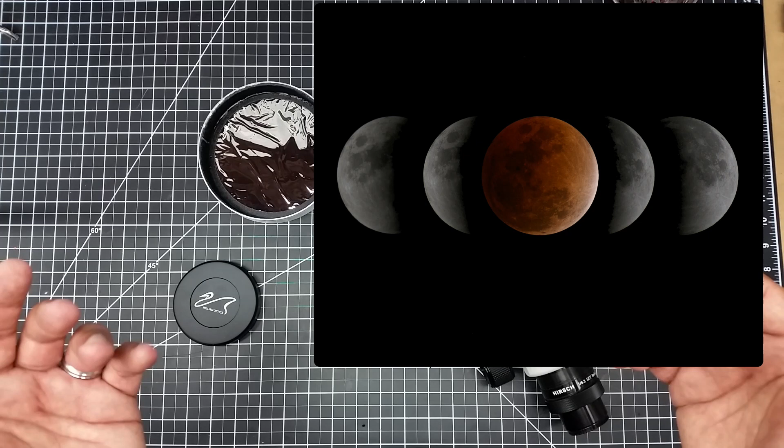Astrophotography can get to be a very expensive hobby, and that's one of the reasons I'm not involved that much in it anymore. But I still have some of the stuff left. With the solar eclipse coming up here in August, I wanted to do some images of it. Now, I've shot a lot of solar eclipses in the past. I'm more of a fan of a lunar eclipse. I'll put a picture of a lunar eclipse I did a few years back - I can't remember, I've done several of them. I just love the blood red moon, and I love cutting them together as they come together.

Anyways, I plan on doing, if it's clear out - now I'm in Michigan, we won't get totality here obviously, but we'll get good enough where it's interesting. So if it's clear, I'm going to try shooting some of that and do a time lapse. And then also I want to do a close-up. I've got this very nice William Optics 400 millimeter scope here with field flattener that hooks to my DSLR, or one of my DSLRs.

One of the things I have from a prior life or experience is this 6-inch visible light solar filter. Now also, forewarning: do not look at the sun during the solar eclipse. Even the only time you technically can look - and I don't suggest it - is during totality, but it will still blind you. So have the right equipment. Google it, whatever, I'm not here to tell you what the right equipment is. I'm just here to share how I'm going to 3D print something to attach this solar filter, which I have from a former 6-inch solar scope I had set up, to this William Optics refractor.

So in short, basically the opening of the sun shield is about 85 millimeters, and this is about 145. So what I'm going to do is print an adapter ring that will adapt this to this scope and allow it to attach like this, so I don't have to buy one of these. They're not too expensive, but by the time I get one and everything else, I just thought this would be a neat project.

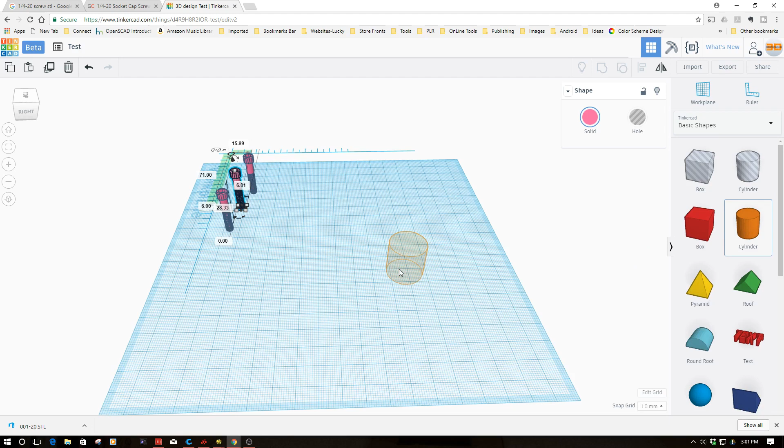So I'm going to use these 1/4 20s, and I'll show you how. But first, where did I get them? I went over to GrabCAD and downloaded the STL file for it, and simply imported it into Tinkercad. Now that I have these 1/4 20s in there, I'm going to bring in a cylinder for my base object, and this is going to fill in for the filter, for this sun filter, the 6-inch sun filter basically.

So I'm going to go ahead and pop in, basically, I'm going to go 145 - whoops, if I get it right here, 145, because I'm at 144.5. I want to go... no, I don't want to go tall. Actually, I'm going to take that back. I'm going to go 144.8.

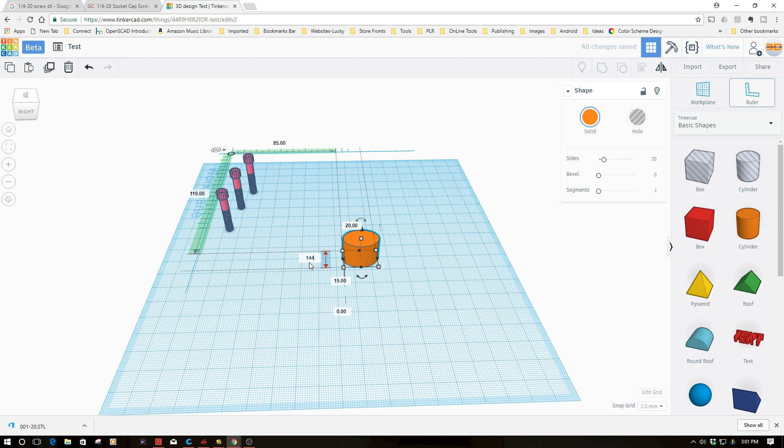And I'm going to go 144.8. If I get this in here. 144.8. Why are you being so difficult? Then it decided it wanted to be.

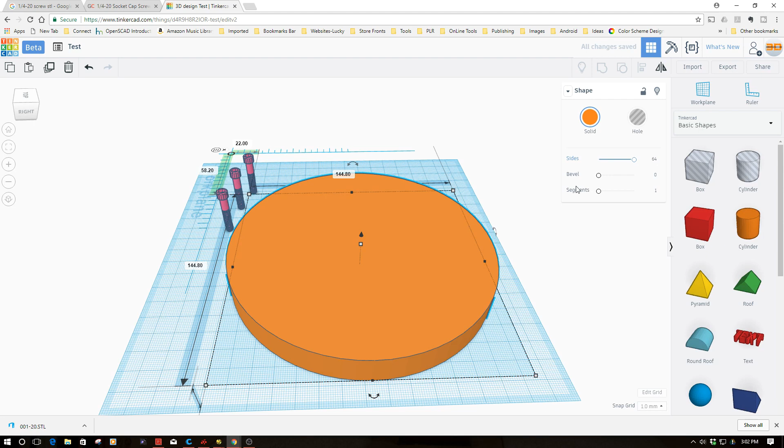Now, the other thing I'm going to do is, I'm in the beta of Tinkercad, so I'm going to move up the sides. I want smooth sides, I hate those rough openings. So now, I've got my diameters worked out. You'll notice I'm 15 millimeters high, and basically my opening is about 28 millimeters high, so I'm going to bump this up to 28.

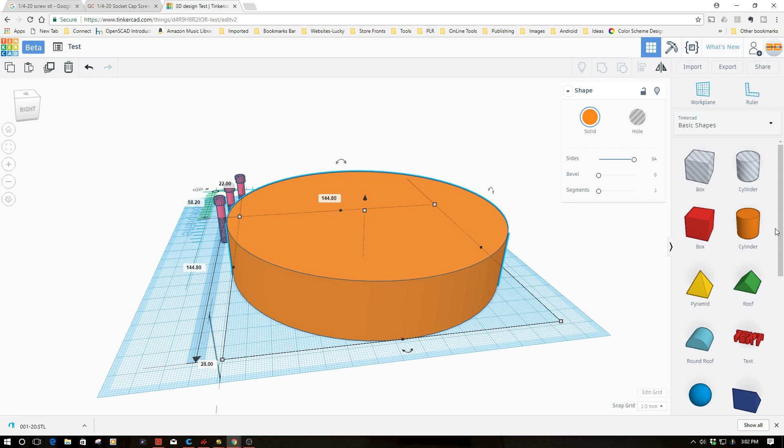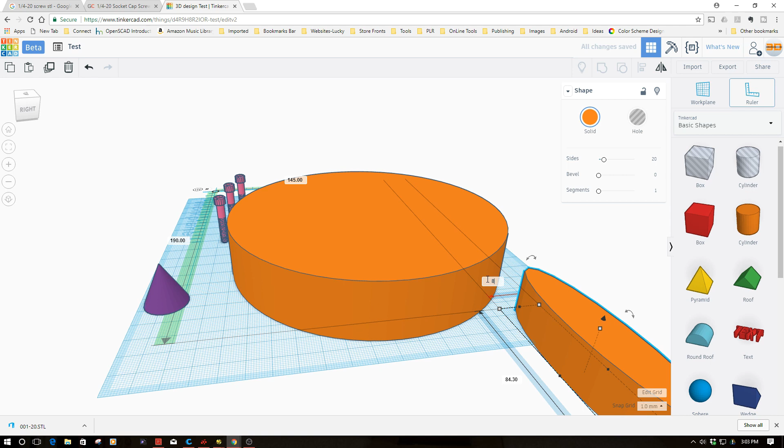Now what I want to do is use the cone, so I'm going to bring the cone object in. And then I'm also going to bring in a cylinder because I'm going to have an opening of roughly 84.1 millimeters. So I want to bring this in, and I'm going to say 84. I'm going to make this 84.3, give myself a little leeway. And then 84.3 again. And then I'm going to bring this over, and bring this up, just using an arbitrary size for right now.

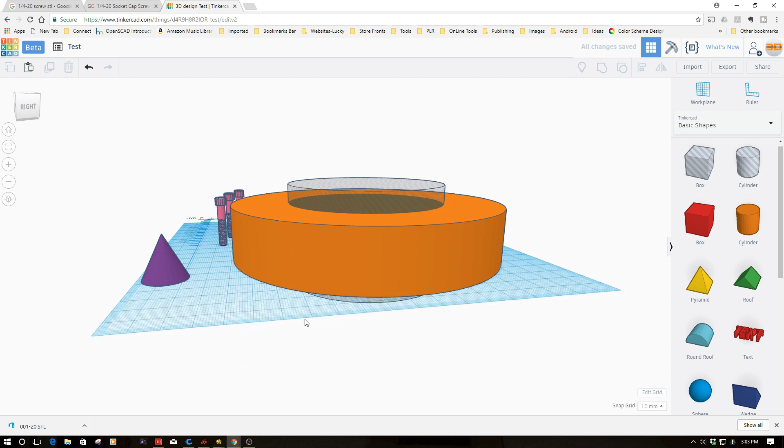I'm going to turn this into a hole. I want sides, and I'm going to push this down so I have a hole, and then I'm going to do my favorite tool, align all this, so this is all nice and good. Now if we look underneath here, we see we have this knockout. Now you notice I still have this big area.

Now one of the things, I'm going to have the lens hood pushed back in, so when you have a lens situation, you basically have a flare or a funnel, and this is where this guy is going to come in. So what I'm going to do is set his base at about, I'm going to make some guesstimates here, about 130. And I did the height again. I hate that all the time, I mess up and get the height.

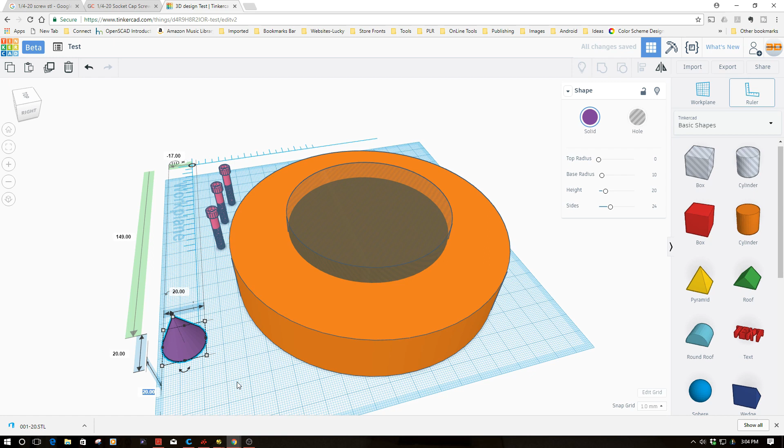Just one of the things of life. So again, I'm going to go here, 130. And again, here, 130. And hit enter. And I'm going to bring up my sides.

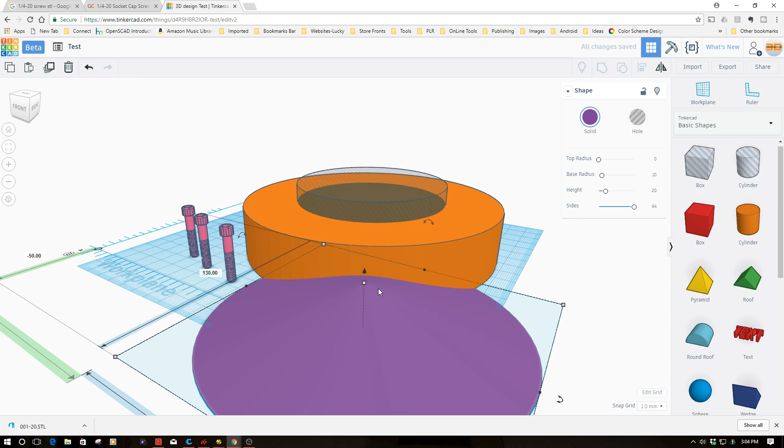And one of the things I want to do is just pull this up. And then I want to bring this into this object here. And part of it is, the reason I put this other circle here is I want to measure this, kind of cheat a little bit. But first I want to take a look at this.

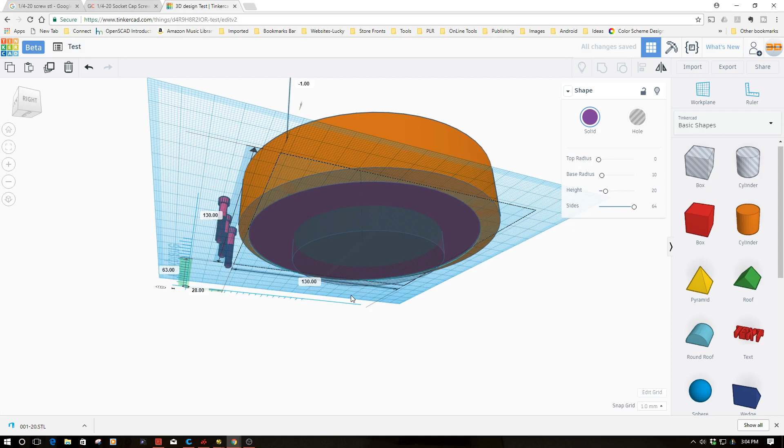So I want to push this down a little bit so I'm through the other side, sort of like that. It doesn't have to be perfect, or at least I don't think so right at this juncture. And I just want to kind of get all this so I can center this. So this is centered. Now what I'm going to do is click on this cone again.

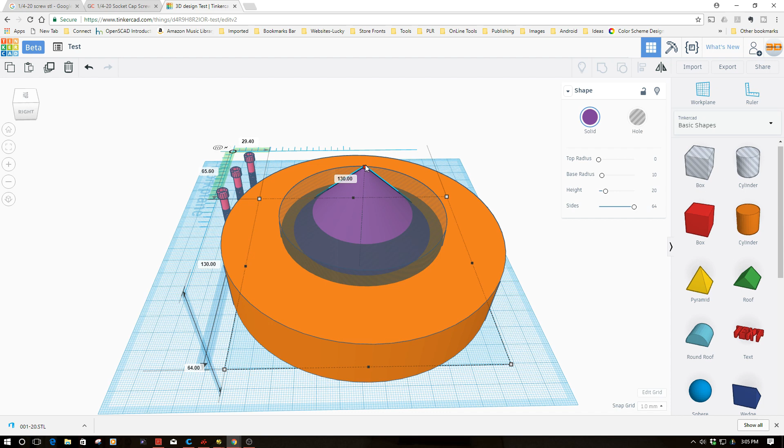And I'm still pretty much short of everything, so I'm just going to keep pulling this cone out until I hit an angle that's pretty close to coming up to my full circle that I have here. Now I need that other circle for a couple different reasons too. So now I'm going to also click this, and turn this guy into a hole. So now this is going to give me a taper.

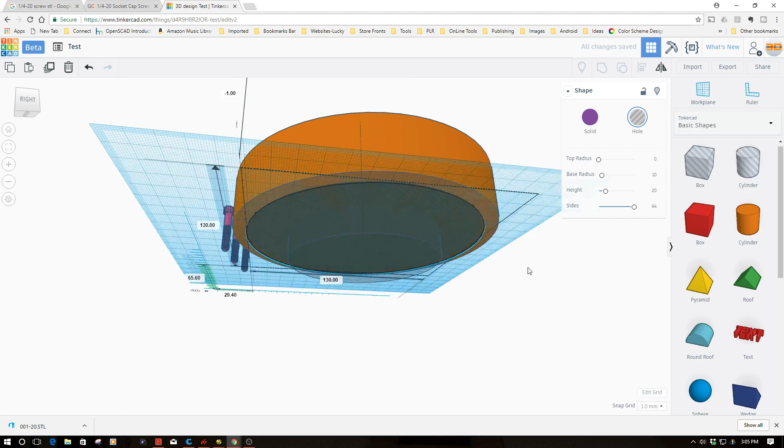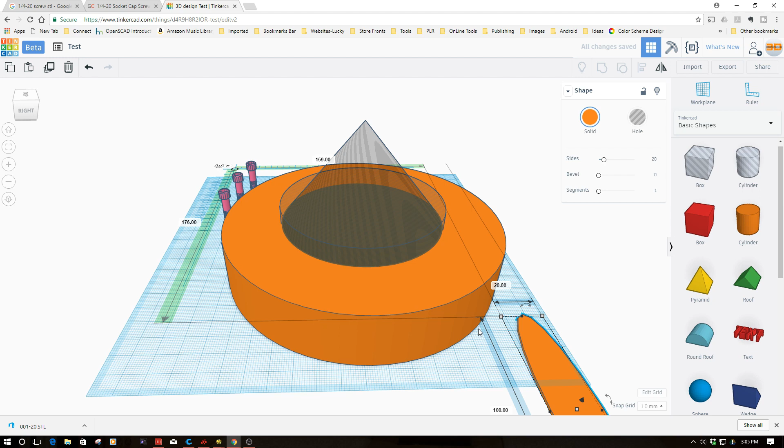Now the other piece that I need to do now is bring in another circle. So this circle I'm going to bring in over here. I'm going to make him, if I'm about 64, let's just for grins and giggles make him 100. And nope, I did it again. Isn't it a Britney Spears song? I did it again, oops I did it again.

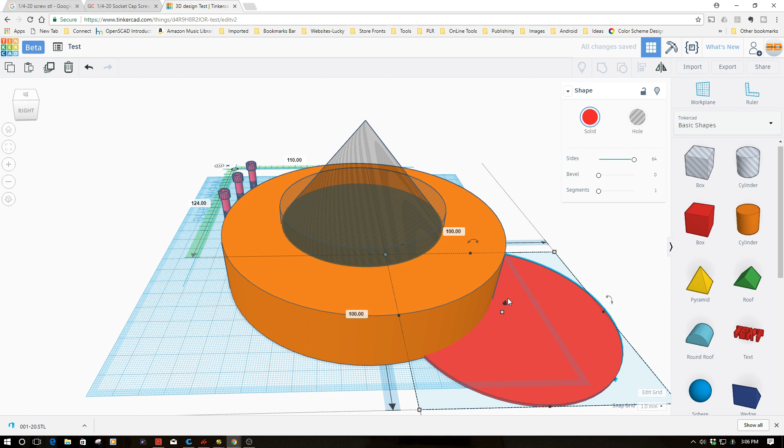Anyways, we're going to make this 100, and I'm going to pull this over here, and then I want to get my sides up there. All right, come on, pull my sides up. It's going to start probably getting a little laggy. I want to change the color of this so I can just kind of see what this is. So I'm going to pull this up. I don't want to move it around, I want to pull it up. There we go. And then I want to pull it up in general.

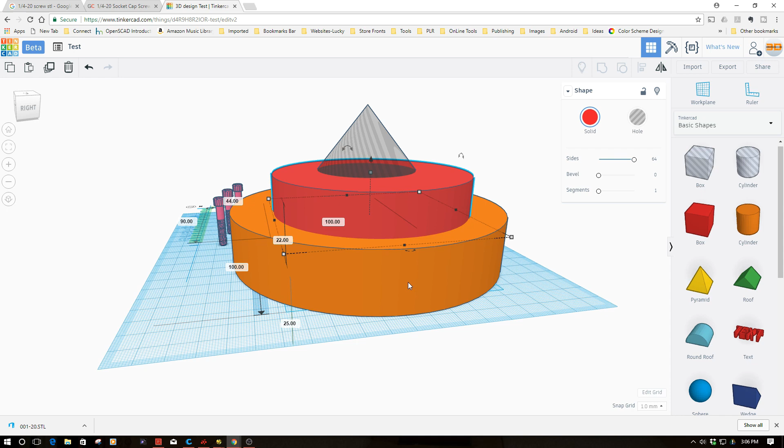So I just have a little bit. And then I want to bring this over into this piece. Now I want to see how. So I have this at about 22. And that's actually quite a bit. I think I'm going to bring this down. So let's see, I can cut a little bit out of this. So what am I at on this?

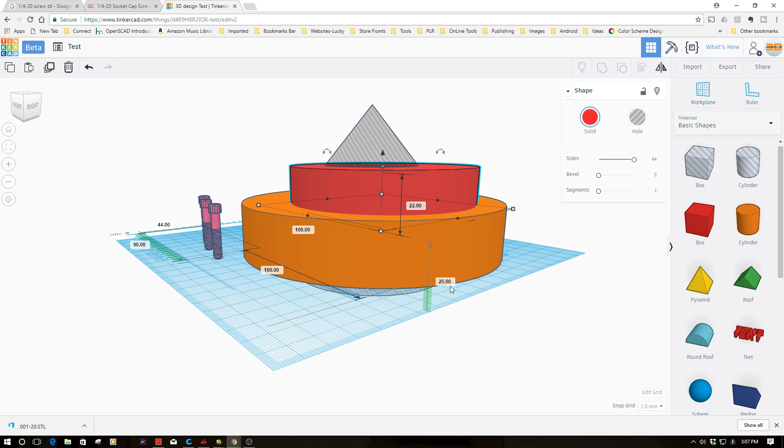So I'm at 28, that's what I wanted to be. And now this one, I am at 22, but how high am I? I think I'm at 25, so I've got 20 exposed. I could probably knock this down to, say, 20. And that looks pretty good.

I think that'll work. Now what I'm going to do is just highlight all this gobbledygook. I think I got it all, except my bolts. I don't want to highlight my bolts because I want to square all this up. And I think that should be all squared up.

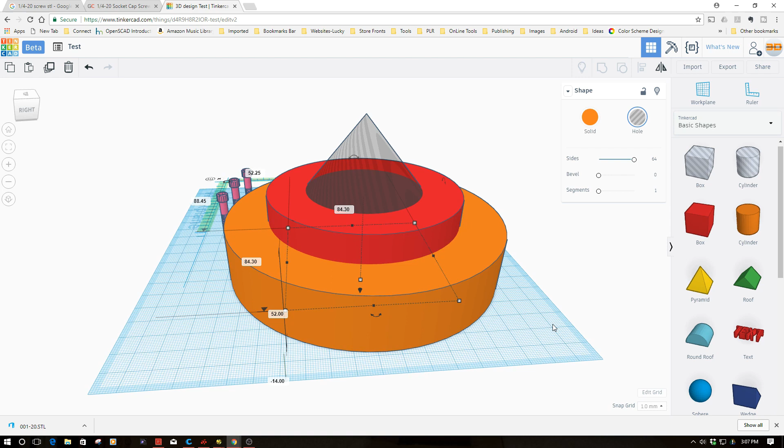Oh, the other thing I have to do, I almost messed up a little bit here. I want to select this, and where is it, the pull up? I want to pull up. All right, that's perfect. I still have it poking through there. That's why I brought that other piece in like that.

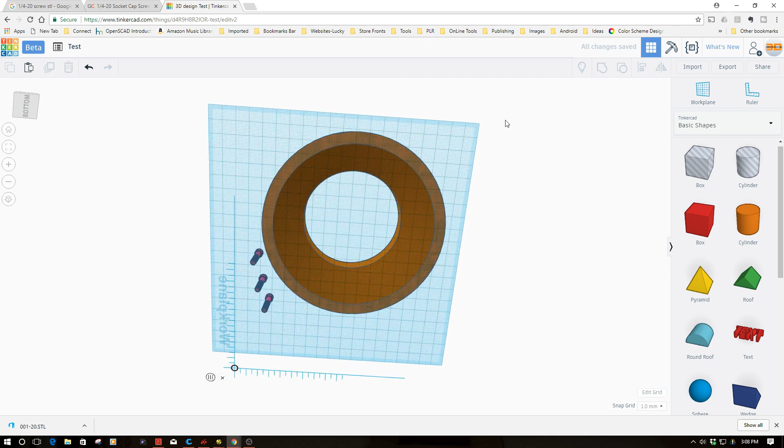All right, so now I am going to go ahead and join all this together. And boom, now you see I have a flare down here on the bottom that forms into a cone. So I shouldn't have, because I'm going to have the sun shield back, so that should be enough where I'm not going to get any vignetting.

Now what I need to do is I need to take these screws, or bolts sorry, and then what I need to do is turn them around and rotate them. Actually, I should have - well no, I can still do that, but I just don't want to confuse you guys. So I'm going to bring this at 90.

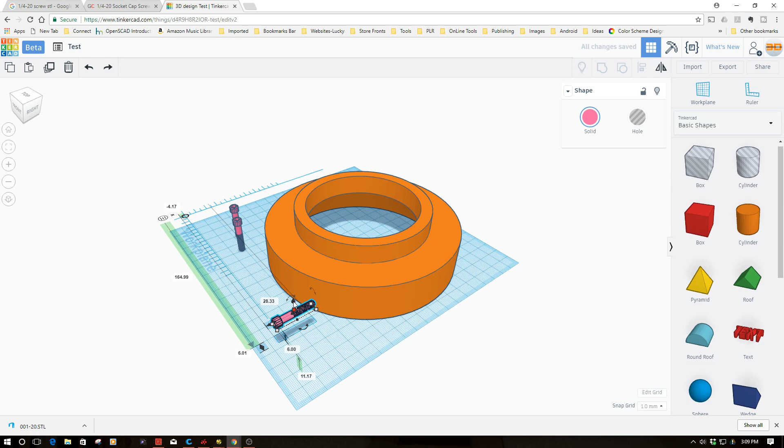Now what I'm going to do is not that. That is wrong, Joe, that is just plain not right. So I'm going to actually save myself some headache. I'm going to get rid of these. I should have thought about it before I did that so I didn't confuse you.

But I didn't, so I'm going to make 3 copies of these at this. Now what I'm going to do is insert this, and drop this guy, because I'm going to use some 1/4-20 nylons to cinch this to the telescope, and I am going to bring this down.

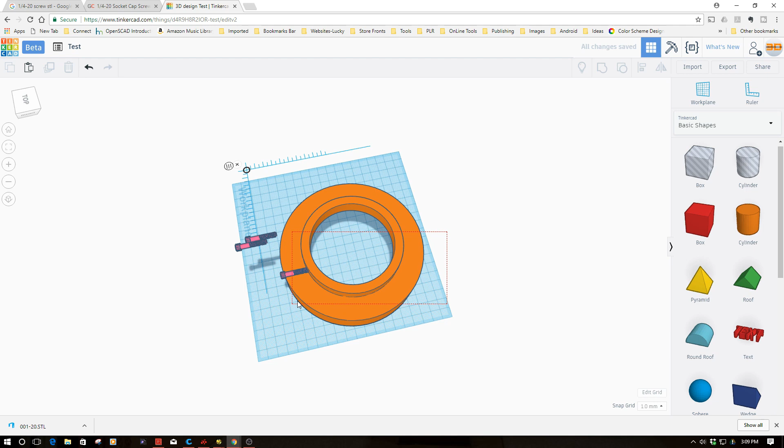And then what I'm going to do is make sure I get these, and then let's go ahead and do an align. All right, so now I got that aligned with that. And now I just need to poke these threads through

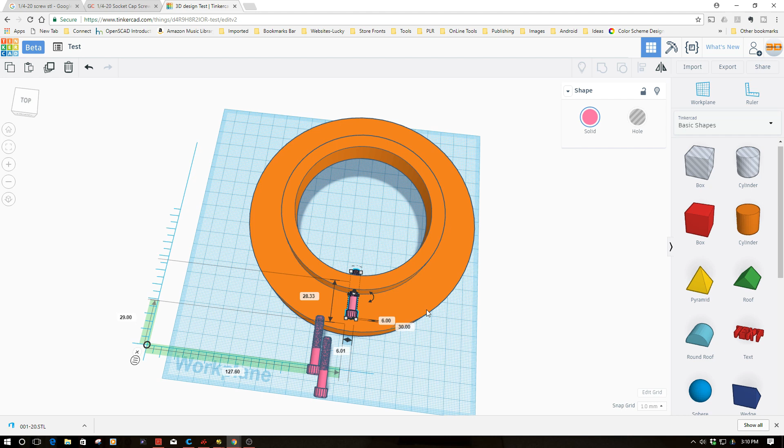the other side. I want to see. All right, now I just need to see how far I'm here. So I want to go up a little bit, and that's about centered. So now I'm going to have to remember this 33. So remember that for me, 33.

Now what I'm going to do is turn this guy into a hole, and then I'm going to highlight and group this. And it's going to have to probably do some thinking.

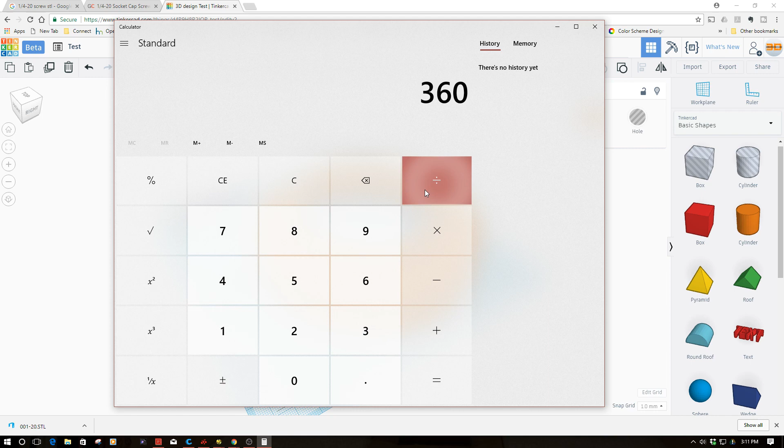All right, now what I'm going to have to do is rotate this, and what I'm going to do is pull up my calculator. I think I can probably do this in my head, but so I have 360 degrees. I'm going to divide by 3, so 120 degrees. Yep, that's what I thought it was going to be.

So then what I'm going to do is take this and hit the rotate. Why isn't this giving me a number? Where is my rotate number? There's my rotate number. So I'm going to put in negative 120.

And then what I'm going to do is bring another one of these bolts over here. And, well, actually over here. And then remember you're supposed to remind me of 33. So now I've got it at 33. And so what I was going to do is want to bring it in here.

And I just want to simply capture these two. Let's do another align. And boom, I've got this aligned. So now I'll get rid of the align, and let's turn it into a hole.

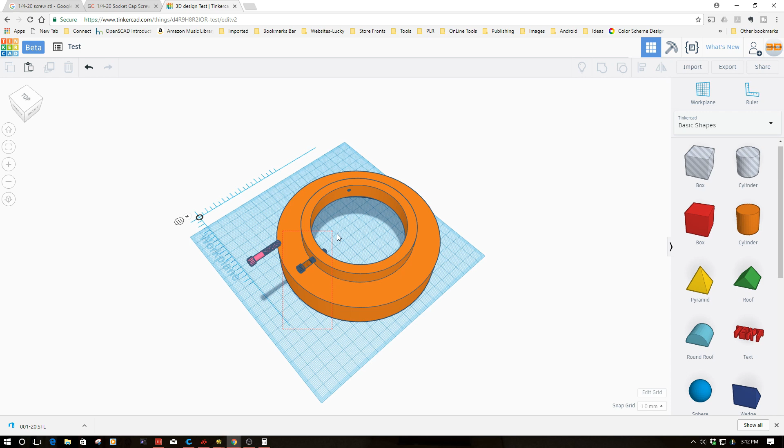And we have it as a hole. Let's highlight everything again - I don't think I got the bolt. So I'm going to do that group, and there's another hole. It'll take a minute to think about it because of all the threads. This is going to get to be a kind of a complex object, even though it looks pretty simple.

All right, so now I've got that grouped. I'm going to go ahead and reselect this, and then enter another negative 120 to rotate it around. And so now, as you see, it's rotated by 120 degrees. I'm going to bring this in. Remember, I need to go to 33.

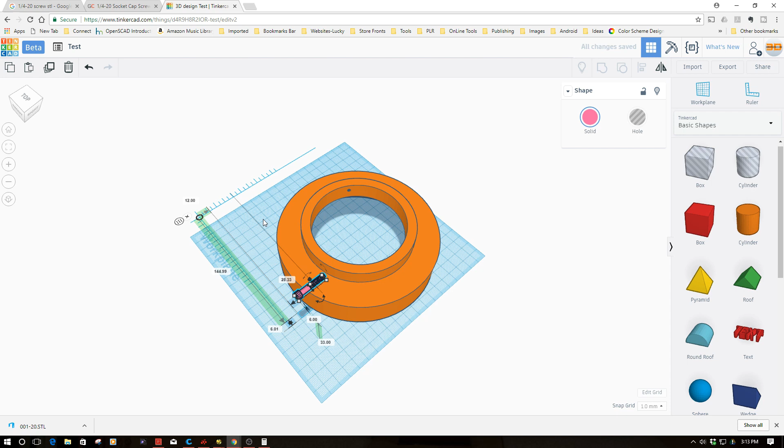I'm at 33. I want to do a center on this. So I've got it as a center. Just push this in. I moved it a little bit, so I just want to do a recenter. And so I recentered it, and then boom, we'll turn this one into a hole, and then we're back here. Highlight this, and boom, we're done.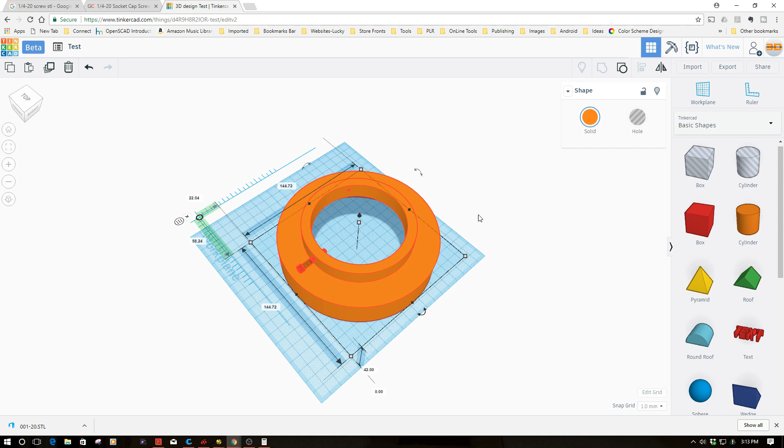So we just need to set this up, and... still thinking. There we go. We have all of our holes. So now we can see we have 3 holes.

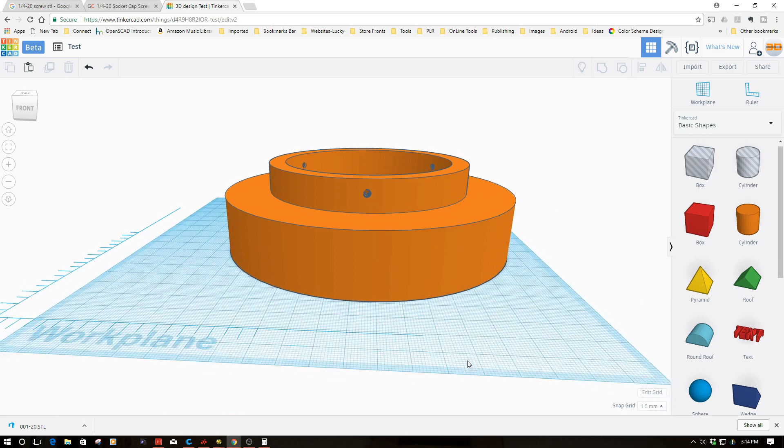I may have to clean these out with a 1/4-20 tap, but what's going to happen, let's take a look here, is they're going to have threads in them already. I'm not going to print this with any supports, so the holes will be a little bit oblong, but I'm going to use 2 shells, and so they'll clean up nicely. So let's go ahead and print this up and see how all this turned out.

Okay, welcome back. So we took a look at designing this in Tinkercad. We took a look at printing it out, and here it is. So it actually came out pretty good.

One of the other things I forgot to mention that I did is I left a little bit of room in here to put some Velcro, the soft side of the Velcro. The idea is this will, if I don't drop it, slide onto here and keep it from scuffing up the telescope, plus hold it nice and tight, light tight.

And what'll happen is these 1/4-20s will press against the Velcro and hold it snug to the telescope without marring the telescope. So another little trick. And then this will now just slide over the top of this, sort of like this, and voila. So there we have it.